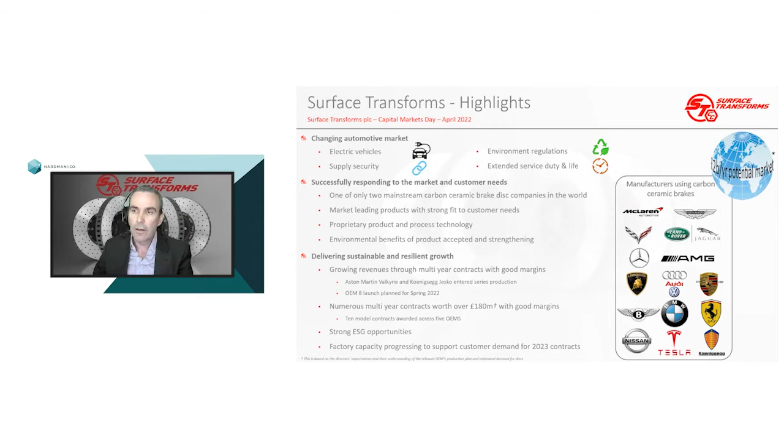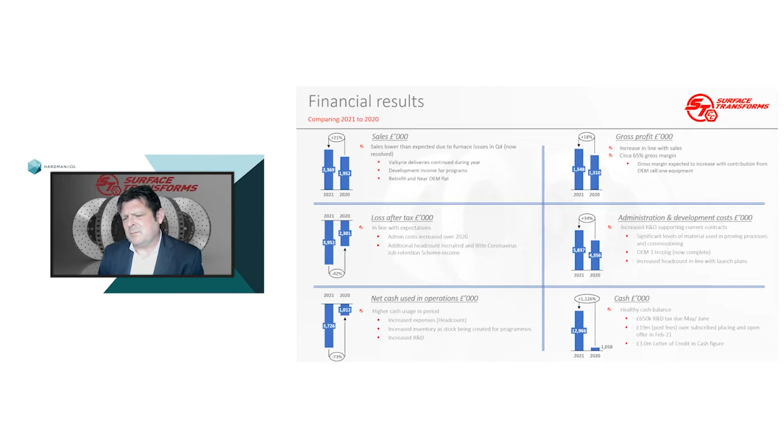So really, as I said at the start, it's really all about us delivering to that customer demand. And to do that, we need to build our capacities up, and we have been doing that in sort of 3 phases.

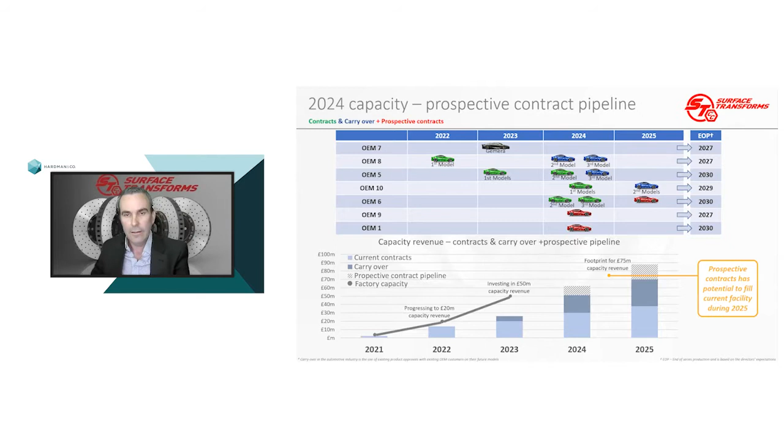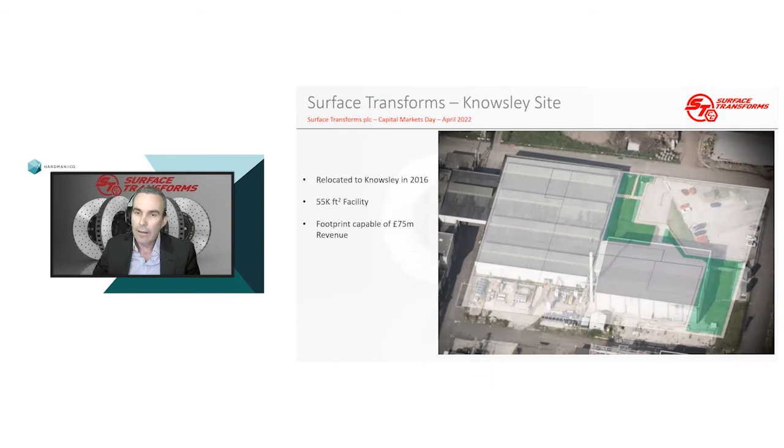So the factory itself, from an aerial point of view, it looks a little bit like an L shape. When you overlay a plan view of that, you can see we have about 55,000 square feet facility. And as and when we put all the kit in there, it should be capable of doing about 75 million of capacity revenue.

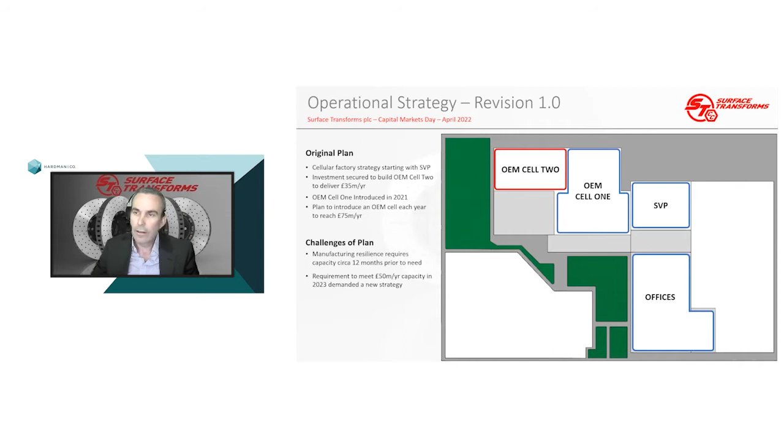Now, our original plan was to go with OEM cells, and we'd originally invested in OEM cell 1, and then we said we would subsequently add cell 2, 3, 4, and 5, building our capacity up as and when we required it. We changed our manufacturing strategy sometime last year, I think it was September. The reason we did that is because we need to be building our capacity arguably sooner, as that demand wave was coming towards us, and we need to be ahead of that wave by about 12 months.

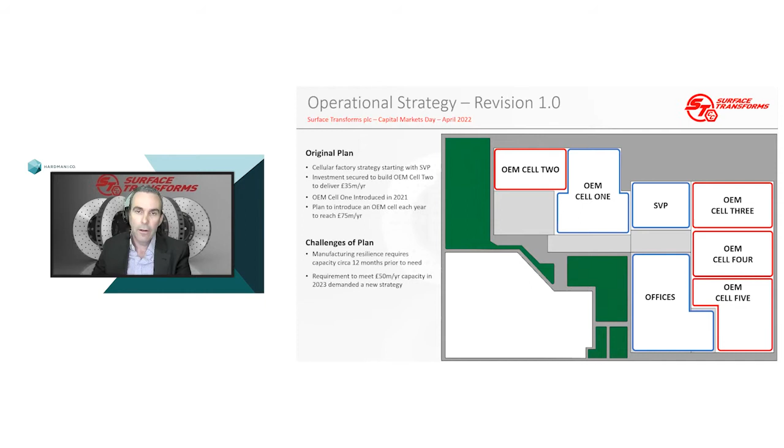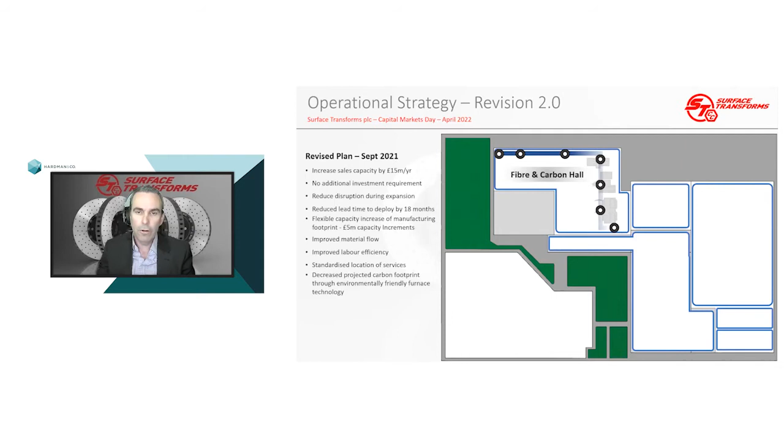And we had the opportunity to change from a cellular plant to a process flow or a plant flow. That plant flow, as we designed it, did away with all of our cells, made the whole plant one production line. It also gave us the advantage that by doing this, we could bring that timing forward a little bit for increasing the capacity, and we could do that at no extra cost. So we could go from what would have been sort of 20 million to 35 million steps to put in cell 2. For the same money, we could get up to 50 million capacity by going to this type of approach. It reduces the disruption as well in terms of adding that capacity.

So we're not disrupting the factory too much. It gives us flexibility in adding increments of capacity going forward. And there's obviously the lean manufacturing approach - rather than splitting it into cells, using one plant flow is much more efficient in terms of the use of our labor and so forth. It also allows us to start standardizing where services were going rather than having them dotted around the plant. One benefit from that is we've been able to talk about having new technology furnaces in there, and that's certainly helping us with our carbon footprint and our energy usage, which is obviously very beneficial from an environmental point of view.

So that's how the plant will actually look now, with a plant flow going through it - flowing through the fibre and carbon hall, through a carbon store, through ceramics and assembly, and then through to completion.

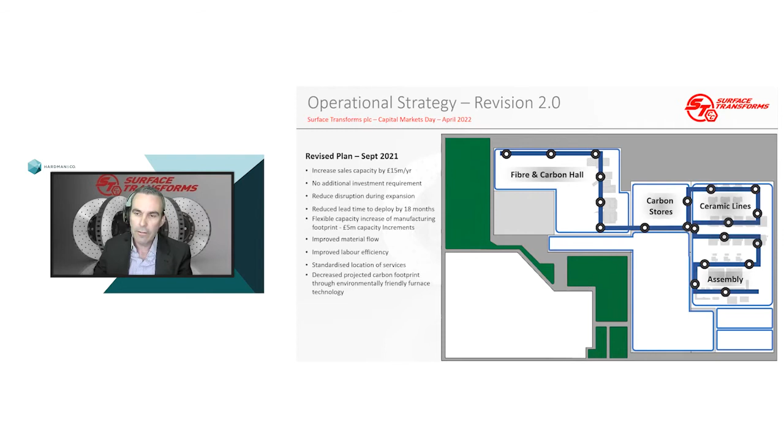But looking in a bit more detail at those steps as we go through it, the first stage is where we needle a fabric together, and we needle that fabric in a sense to make it from a 2D dimensional structure into a 3D dimensional structure. There's a lot of technology in this. It took quite some time to put the whole thing together.

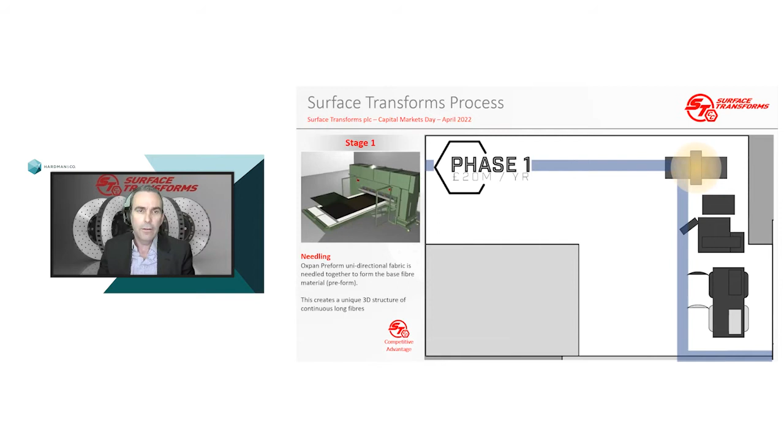But it now works well, and the machine that I'm showing there is good for phase 1, up to 20 million of capacity. And then if we move into phase 2, we'll be just replicating that with some enhancements with the second machine.

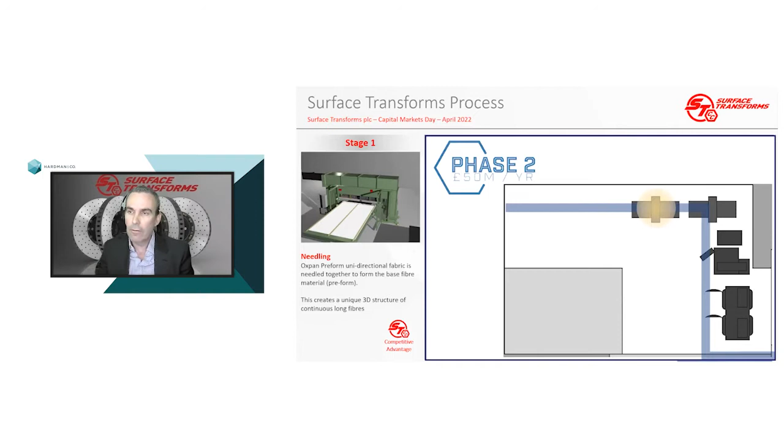That's an important thing, because one of the themes of what we're trying to do here is not just building capacity, but building resilience. One of the risks if we only have one machine available is if that machine has a breakdown, what do we do in terms of resilience? That's why we're always looking to add a second machine in phase 2 to build our resilience as we go. So that's stage 1.

Stage 2 is carbonization. After we've knitted those fibers together, we need to convert those fibers into carbon fiber. We do that in a hot furnace, a batch process where we put those parts in and burn up all the organic material, which leaves us with pure carbon remainder, but in the fiber form. We have a furnace that's already in place, and that's good for our 20 million.

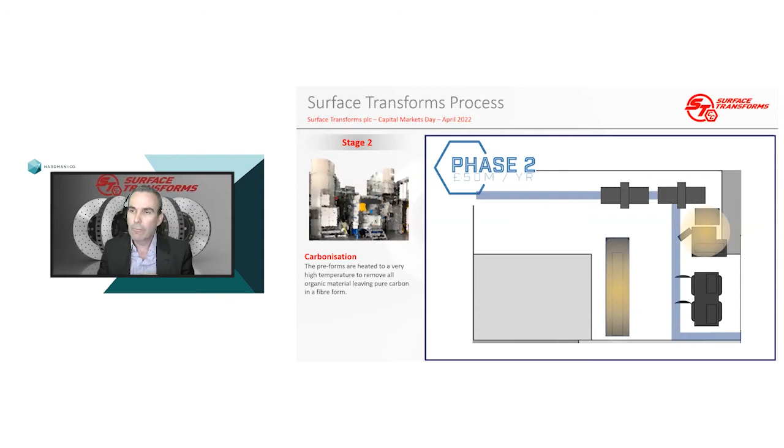In phase 2, we've ordered a furnace to go in, which will take us up to 50 million. Not only will it give us that capacity, it'll give us some manufacturing resilience by having that second furnace available.

Stage 3 is where we then do a process called chemical vapor infiltration, or CVI for short. We've had a furnace installed for CVI - this is the furnace we talked about in December, which had a couple of issues. Those were resolved quite quickly in January, and we've been able to install that. But again, we only have one of those, which is good for 20 million of capacity.

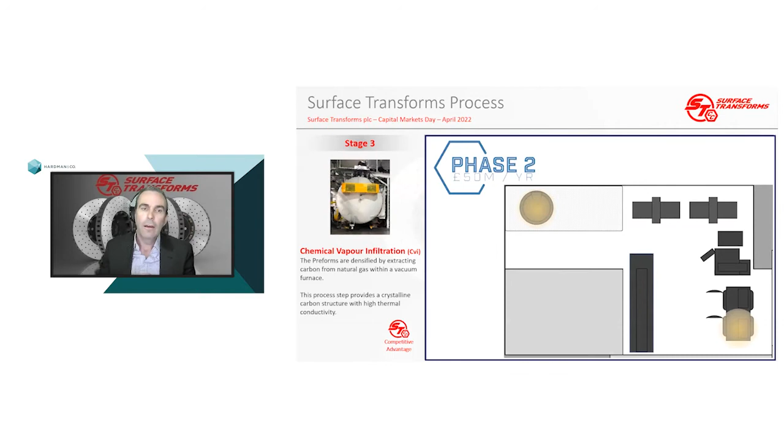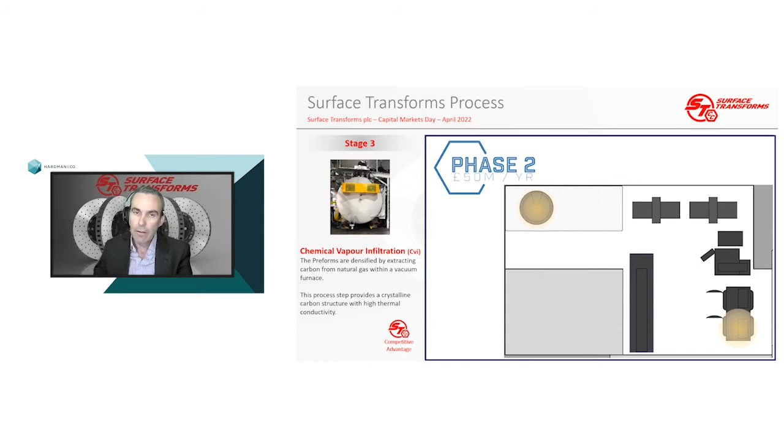Everything's automated and controlled to give us the product we want and the process control we want. We're now replicating that in phase 2, adding 2 more furnaces to get us up to our 50 million capacity and give us that capacity resilience we need. That really completes the first part of the plant, in terms of fiber and carbon hall.

We then move through to the ceramic hall I showed you, where at that point the material is a generic material. It's a bit like a polo mint - we haven't actually cut it into any shape yet, so it can be allocated to different customers. But at this stage, the material is relatively soft, so we start to cut it into a design which we are committing to a customer.

We do that using CNC machining centers with particular tooling, programs and speeds and feeds that we've designed to make the process efficient and productive. We have 4 of those in place to give ourselves phase 1 capacity. Similarly, to move up to phase 2 for 50 million, we'd just be adding more CNC machines to allow us to do that, which would give us the resilience as well.

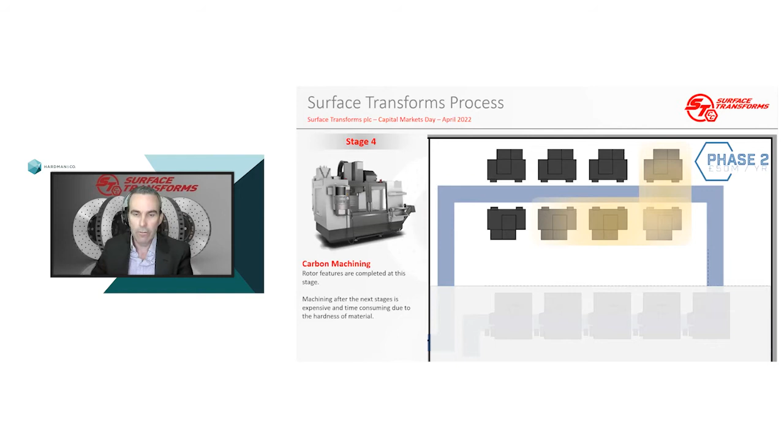Stage 5 is where we move back into some furnace technology. Here we've got to convert the carbon that we put down in the material into a carbon ceramic, and we do that by a melt infiltration process. Our melt infiltration process is another hot process - we have to melt the metal, then use the carbon effectively as a dry sponge and dip it into the liquid metal, and the metal is sucked up through capillary action into the part to give us the carbon ceramic disc we desire.

We have these furnaces in place for phase 1. We actually have a lot of these furnaces already in place as well for phase 2, and those furnaces will give us our phase 2 capacity of 50 million.

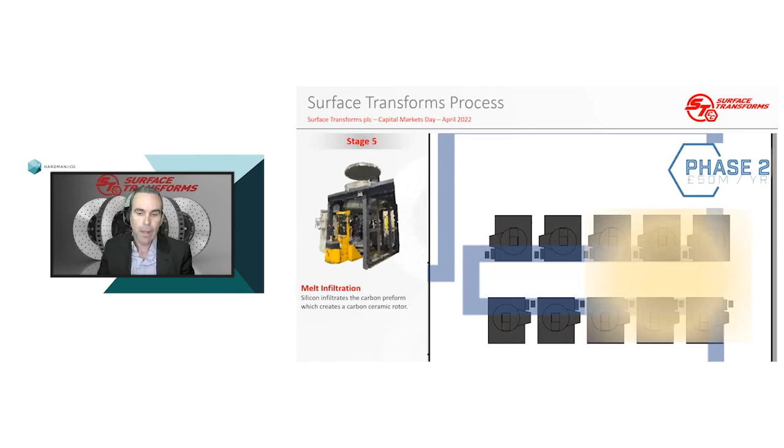Now we have all the material pretty much done there. There's one more chemical step that we're going to go through, but we've now got a very hard carbon ceramic material which needs to be finished so it can be put together through the assembly line. We've done most of the machining prior to this stage, but there is still some final machining we have to do to get it into the drawing spec we have.

We have a particular set of diamond tooling that we use for this, which took quite some time to develop, because the hardness of this material is almost as hard as diamond. The only thing harder than our material is diamond, and we use diamonds to cut it, mill it and grind it. We have those CNC machines in place to do that for the 20 million, and to scale up to 50 million and give us that capacity resilience we desire, we'll be adding more machines to the footprint we already have.

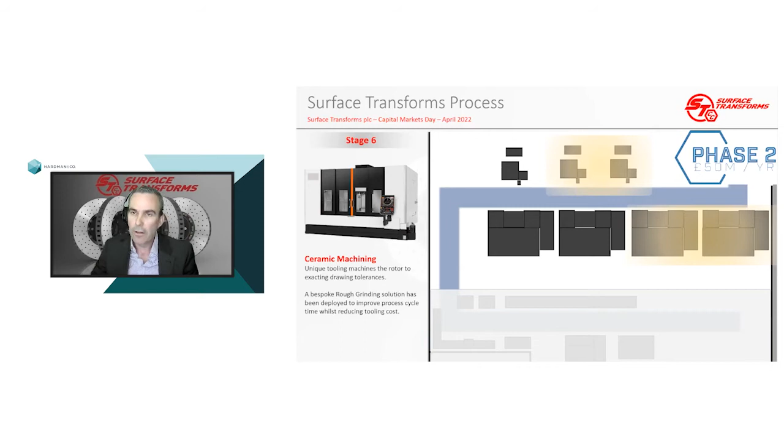Takes us onto the final chemical step, which is an antioxidant coating and impregnation. We have a dipping process that allows the material we apply to impregnate the disc, attach to the carbon and protect it. We're trying to protect that carbon because it will oxidize at temperatures above 400, and brakes on cars get much hotter than that. This antioxidant treatment allows the carbon to withstand those higher temperatures, giving us the benefit of endurance as part of the life of the disc.

That process is good not just for 20 million, but up to 50 million as well. The resilience is in the capacity we have — it'll only run when we need it, and if we need to run it more to catch up time we've lost, we'll have the capacity available to do so.

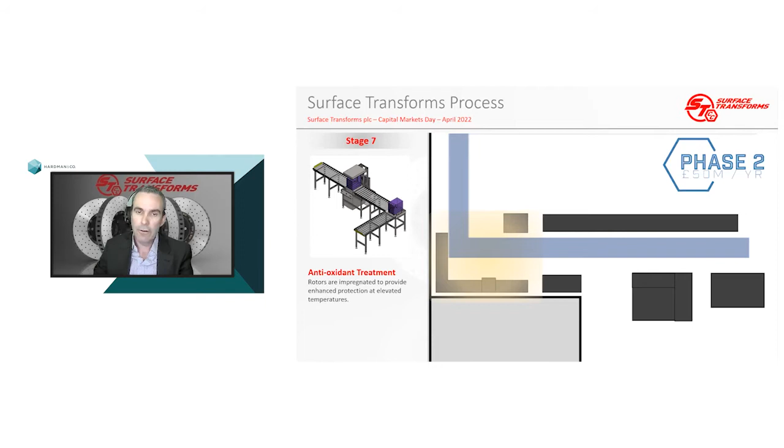That's finished the chemistry, if you like. We now have to put the whole thing together into a component. That starts with assembly, where we design the whole part. We then assemble the bell alongside the rotor to make it into a proper brake disc. We have an assembly jig that does that, good for 20 million. Again, to give us that resilience and up to 50 million capacity, we just replicate that and create a new line.

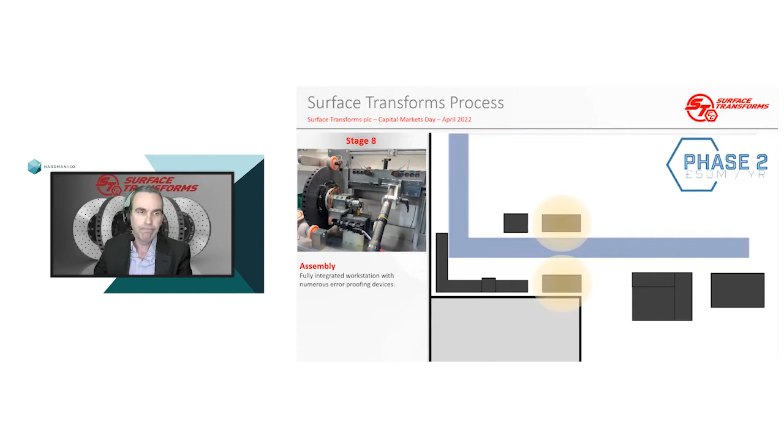Moving on, we do a final grind to reach the tight tolerances we have for the product at the end, down to very small levels — microns. We work to certainly less than 10 microns, probably close to 5. We have a machine in place that does that up to 20 million, and we replicate it again to give us the resilience to 50 million capacity in phase 2.

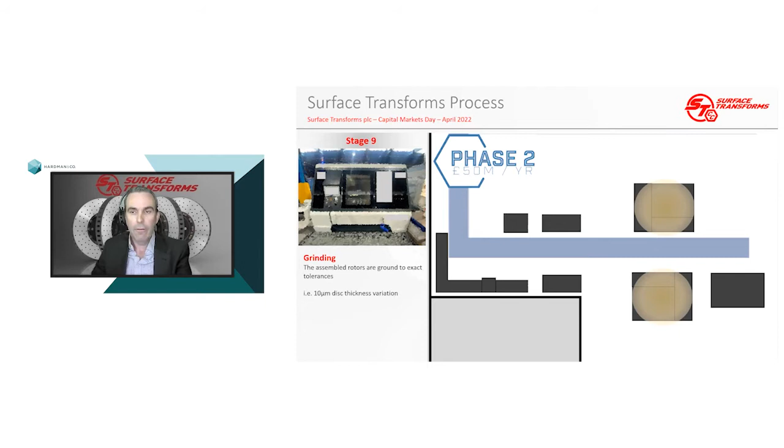And then the final step is balancing. This is a rotational part on a car, so any out of balance when it rotates will be felt as a wobble or vibration. Rather than adding weight like on a wheel, we take weight away — we spin the disc up and then machine a slot into the side of the disc if needed.

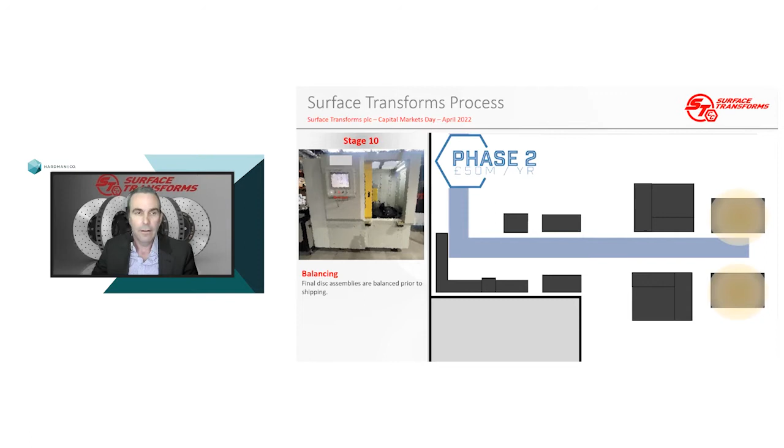This machine is already in place for the 20 million. Again, phase 2 would be to replicate that and the whole assembly line, giving us the resilience we need for 50 million.

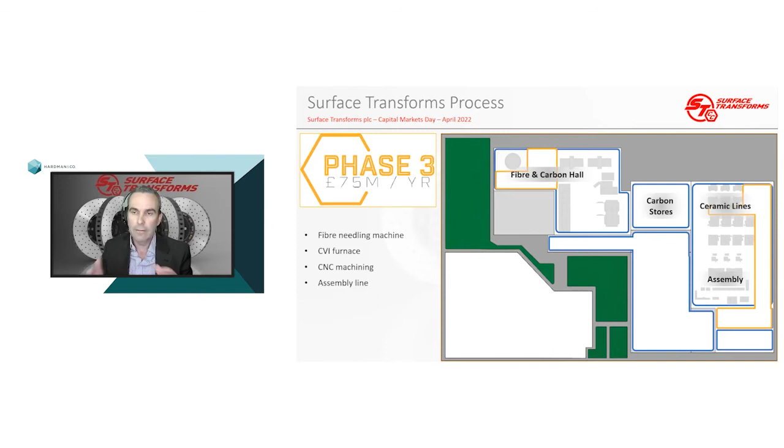The final slide, before I wrap up and take questions, is the bridge to phase 3, the footprint for 75 million. You can see highlighted areas where we'd add more needling machines, more CVI machines, more CNC machines in the ceramic lines, and an extra assembly line at the back. That takes us from 50 million right up to 75. So it's well understood how we'd make the investment needed to take us from 50 to 75, utilizing the similar technologies we've already employed across the whole process.

I appreciate I've gone through that quickly, as the questions are probably more valuable than me talking. The investment summary: we have sustainable recurring OEM contracts in place, we're in a market that fits well with our products, and we have a market-leading product. We've got successful contracts now coming through for multi-year approaches, giving good margins of profitability, and should we win carryover and pipeline models, we'll take up all of our factory capacity of 75 million.

The plant flow we've moved to has been successful from a cellular point of view. We're progressing that capacity from 20 million through to give us resilience with 50 million, which we're investing in — and the majority of that's done. And then there's the 75 million capacity available in terms of a footprint.

From a business side, we're working this year through the launch with OEM 8, giving us high growth from all the contracts we've got, with an order bank of 180 million across 5 customers. Looking further out, we can talk about growth above 20% in 23, 24, 25, and a return on sales greater than 20% in 24 and 25, as we're ramping up through this year and next year.

And that's really the story. I'll stop there and hand back over to David, who will chair the questions.